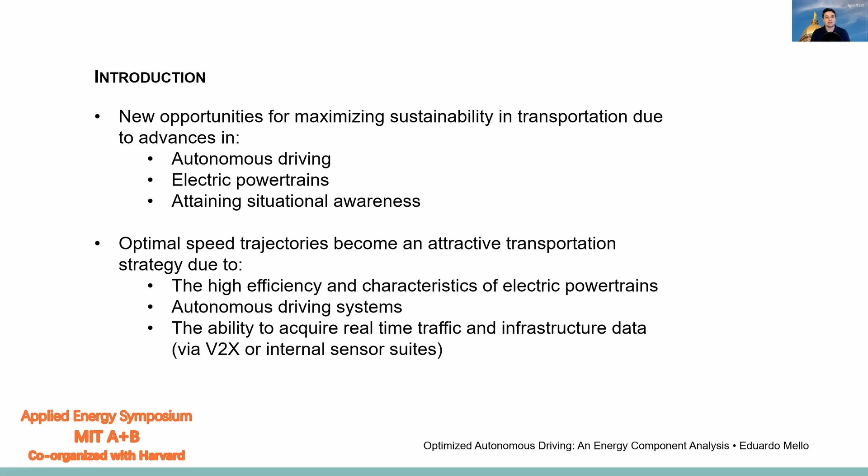Among the approaches that have already been taken to minimize the energy consumption of electric vehicles, I would like to highlight a few. The first one being green waves, that is when a vehicle tries to minimize the number of red lights it faces going through signalized intersections, utilizing vehicle information and infrastructure information. That is often coupled with eco driving, that is when a vehicle tries to minimize its speed variations and also the idling times and the number of stops to save on energy.

Another approach that's used is one pedal driving, that is when a vehicle starts to use regenerative braking as soon as the driver stops accelerating or removes their foot from the accelerator. And finally, optimal speed trajectories, where a vehicle with at least level 2 of automation could use infrastructure and vehicle information to generate an energy optimal speed trajectory to drive a specific segment of a road or street. And this could be the length between two signalized intersections, between two stop signs, or other traffic constraints like speed limits.

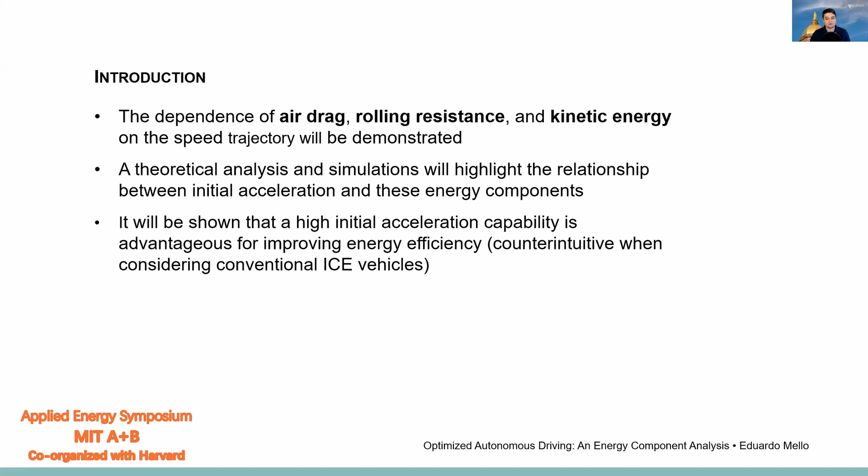In this presentation, we will focus on the dependence that energy optimal speed trajectories have on their air drag, rolling resistance, and kinetic energy components. We will demonstrate a theoretical analysis and simulations that highlight the relationship between the initial acceleration and these energy components. And we will also show that, counterintuitive to what we think about internal combustion engines, high acceleration capabilities are advantageous for improving the energy efficiency of electric vehicles.

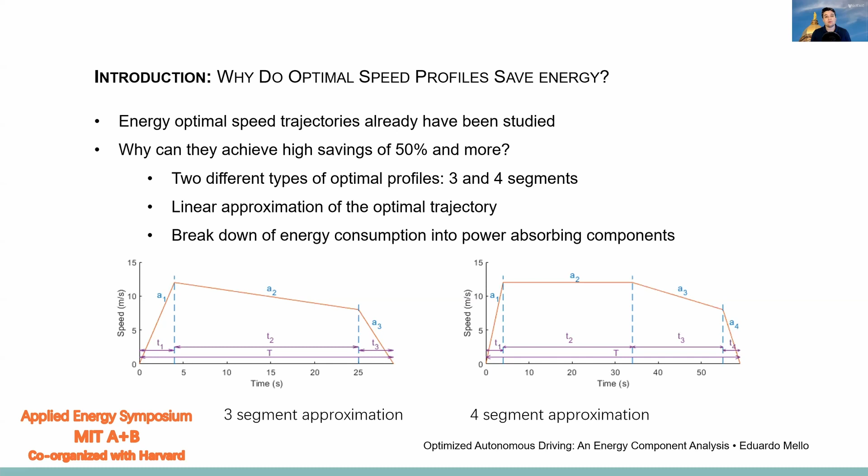Optimal speed profiles have been previously studied, and they were shown to save upwards of 50% of transportation energy. This brings the question of why do they achieve such high savings? In order to respond to this question, we will analyze a linear approximation of these speed profiles. There are two different types of optimal speed profiles: a 3-segment and a 4-segment one. We will focus on the 3-segment variant that is defined by an acceleration phase, a coasting phase, and a final braking. To analyze the savings, we will break down the energy components of this linear approximation into its power absorbing components.

In order to calculate the energy consumption of the speed trajectories studied in this paper, we will use the following energy model. It's based on the power at the wheel being the sum of all power absorbing components in a moving vehicle: the acceleration power, the air drag, the rolling resistance, and the hill climbing. We will assume the hill climbing to be 0 for our calculations, and multiplying that wheel power by the efficiency of the combined mechanical and electrical powertrain of an electric vehicle, we can get the power at the battery. Integrating that power at the battery, we get the energy of the vehicle.

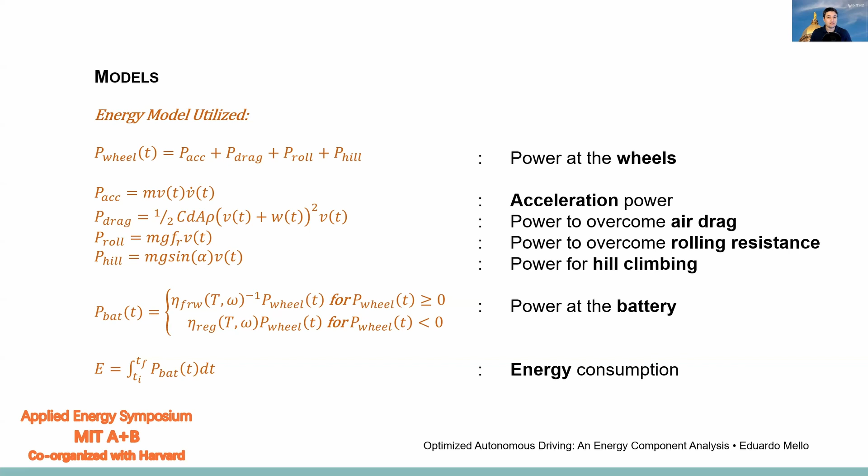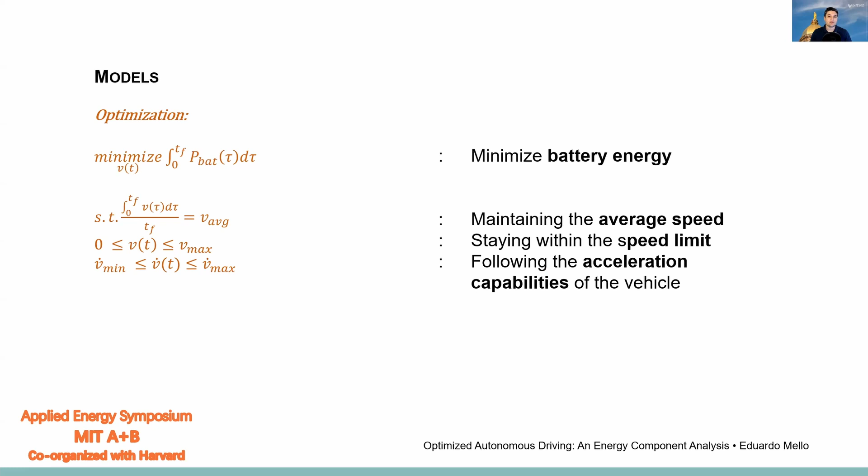As previously said, the energy component analysis will be based on the linear approximation of the three-segment optimum speed profile. In order to obtain this linear approximation, a few variables have to be defined. The first one being the distance traveled by the vehicle, the acceleration capabilities of this vehicle, and the average speed desired. From that, we can obtain the coasting deceleration and the duration of each one of the three segments.

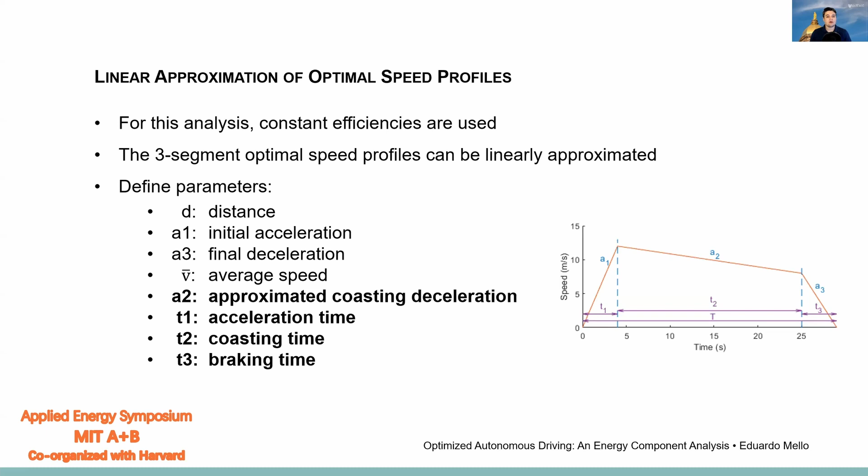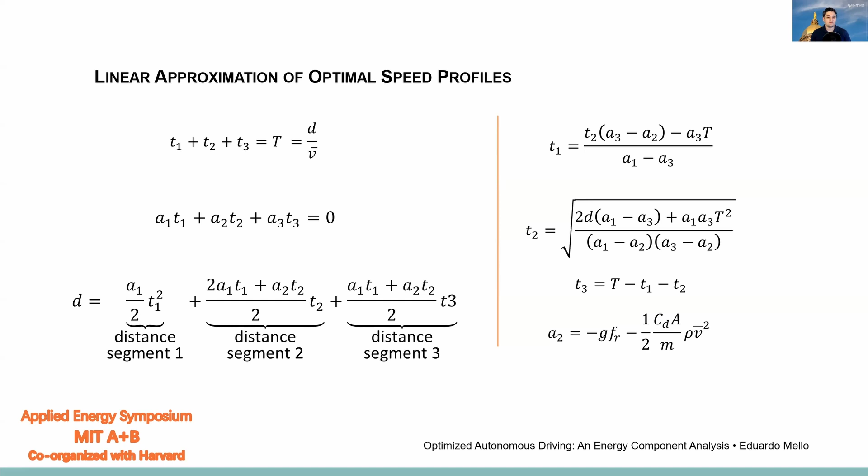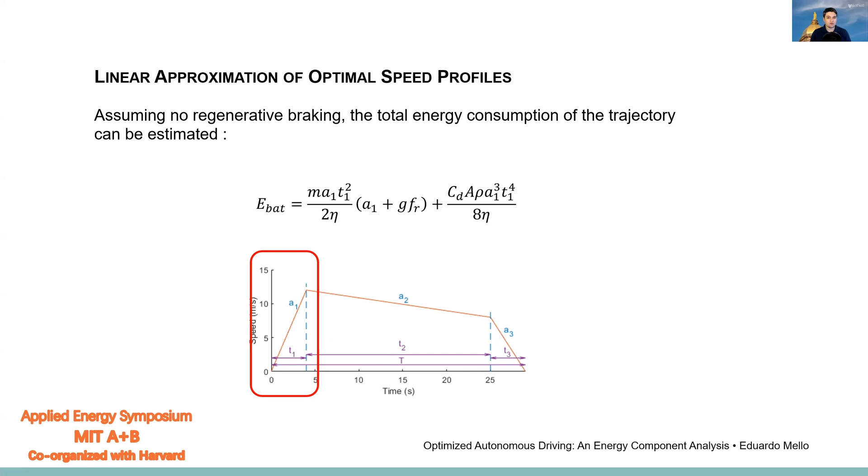Here, we show the energy consumption of three trajectories, a distilled version of the FTP75, the closed form solution, and the optimized trajectory of same average speed and segment length. The calculations were performed for segments varying from 300 to 700 meters and utilized 85% of forward motion efficiency and no regenerative braking. By comparing the first two bars, we can see that the estimated energy consumption utilizing the closed form equation gives you a very close energy value to the actual energy consumption of that trajectory.

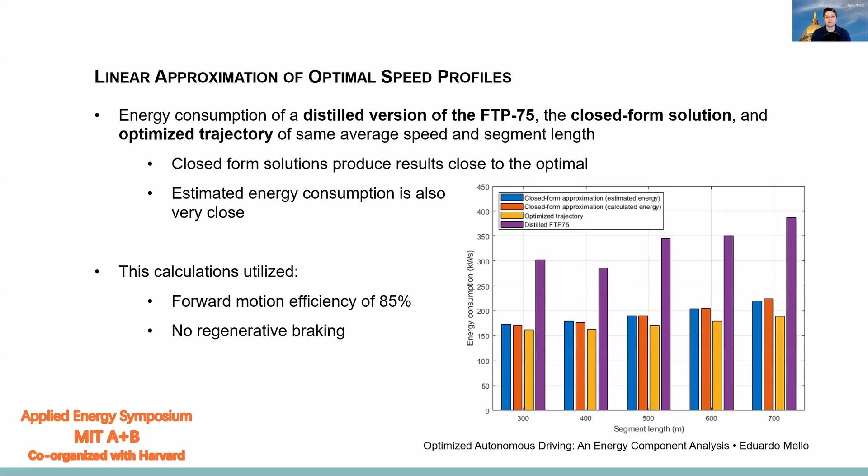The third bar shows that the energy consumption of an optimized trajectory with the same parameters is always a little better than the closed form solution, while the fourth bar shows that the energy consumption of the distilled FTP75 is always much higher than the optimized or the linear approximation of the optimization in any of the cases studied here.

The 300-meter trajectory from the previous slide is shown in here. We can see that the optimal trajectory and the closed form solution are very close to each other. The main difference is that the optimal trajectory utilizes coasting, while the closed form solution may be slightly accelerating or braking during the second segment of the trajectory.

The majority of the savings we obtain come from the fact that the linear approximation and the optimization, for that matter, reach a much lower maximum speed, significantly reducing the acceleration component of the work realized by the vehicle. That's named W kinetic or work kinetic in the third graph. Also, these trajectories only utilize energy in the first segment of the trajectory, and in the second and third segments, the accumulated kinetic energy is utilized to overcome the air drag and rolling resistance.

Looking at the third graph, the last bar in green represents how much of the kinetic energy was recovered to overcome these two other components, the air drag and rolling resistance. Thus, it works kind of like regenerative braking, but since it acts directly on the work at the wheels, it has a much higher efficiency than the actual regenerative braking. You can see that in the middle plot, while the typical trajectory utilizes energy for half of the total time, the linear approximation only utilizes a significant amount of energy for the first 3.5 seconds.

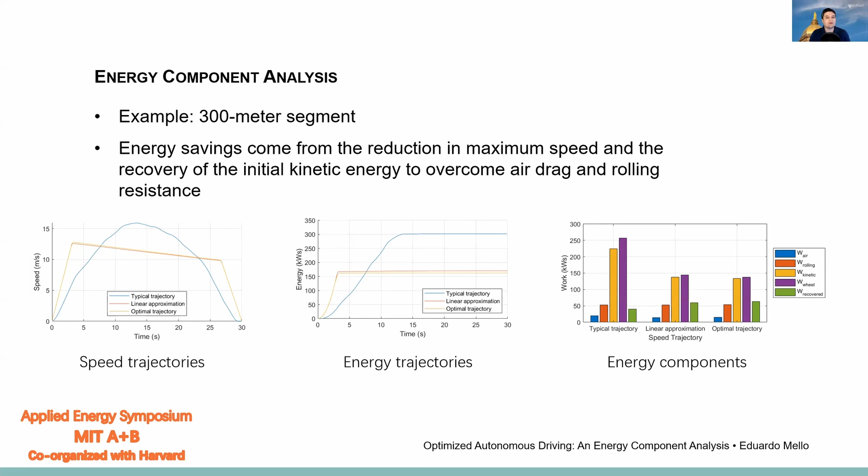This slide shows the energy breakdown for two more segment lengths, and we can see that the same trend happens for every segment length, with the linear approximation and the optimization utilizing much more of its kinetic energy to overcome rolling resistance and air drag.

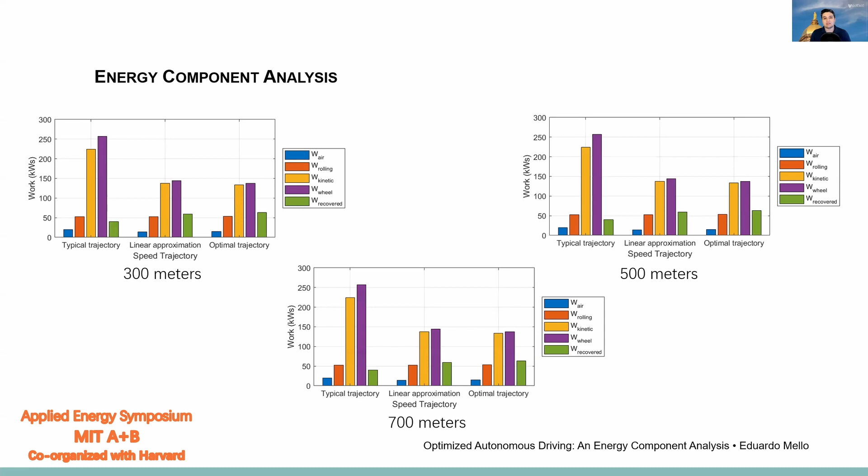It was previously demonstrated that high accelerations can provide higher savings in energy optimum speed profiles. And since most of our savings come from the reduction in maximum speed, having very short acceleration periods at the beginning of the speed trajectory, we decided to perform simulations to analyze how this initial acceleration can impact the energy consumption. Calculations with estimated energy, constant efficiency, and efficiency maps were used.

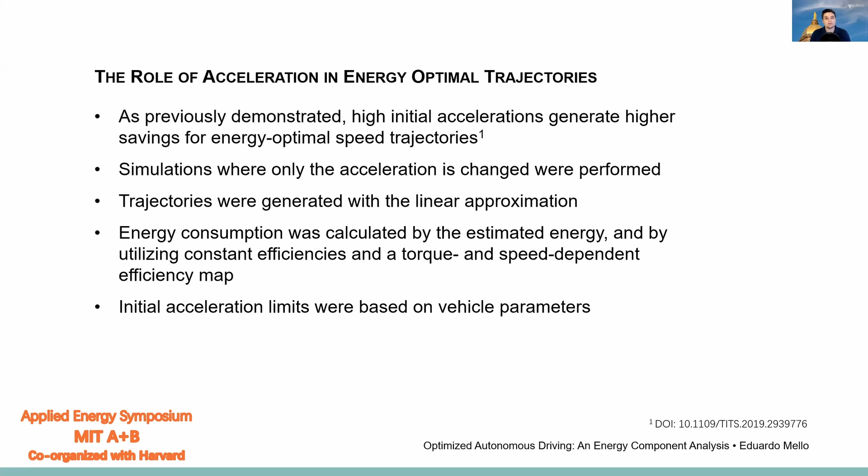In this analysis of the role of the acceleration, 2 efficiency models were utilized, the first one being constant efficiencies, where 85% of forward motion efficiency was used and no regenerative braking, and also efficiency maps were utilized. 2 vehicles were also considered, one based on the chassis data of a Nissan Leaf, and the second one based on the chassis data of a Tesla Model S.

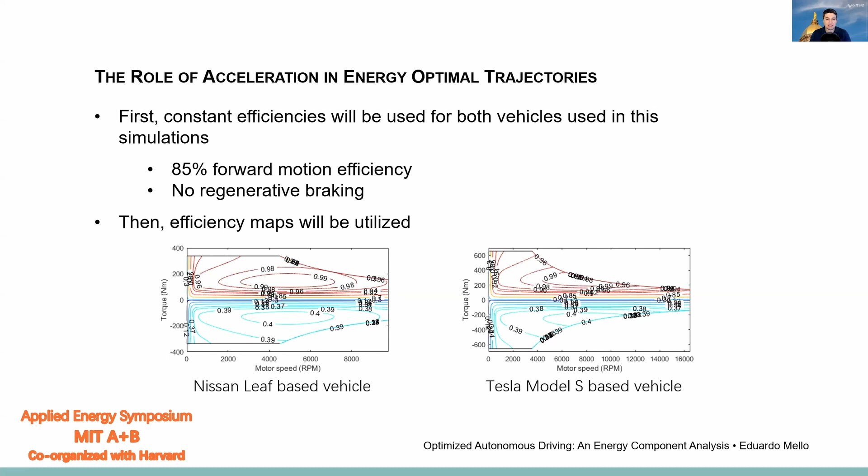For longer segments, the energy consumption is more linear than before, and the optimization does better than the estimated consumption for all accelerations, not only for high accelerations. However, the computation complexity of the approximated trajectory is significantly lower than the optimized trajectory, making it still an attractive implementation.

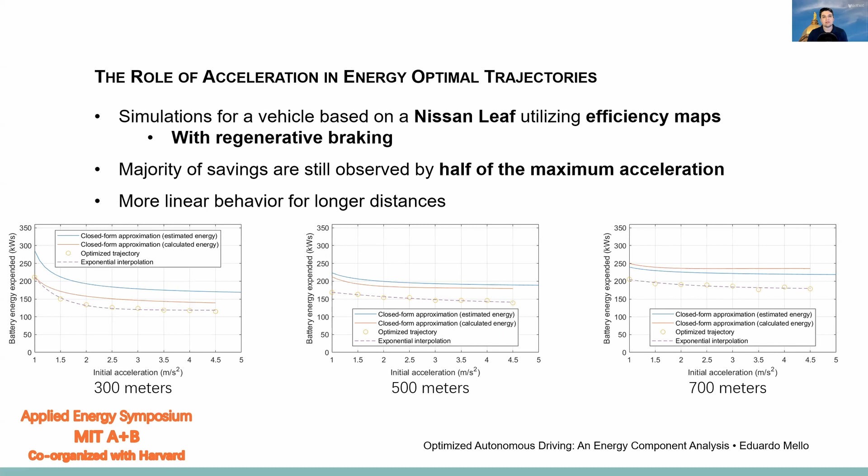A last point that's worthwhile mentioning is that the actual calculation of the energy consumption of the closed form approximation utilizes more energy than the closed form approximated value in the 700 meters scenario. And that's because the approximation is a better fit for shorter segments than for longer ones.

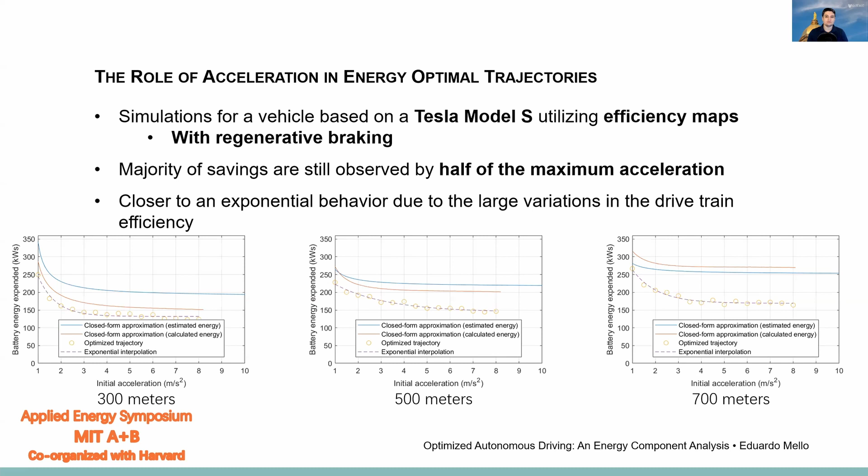From these previous results, we can conclude that the 3-segment energy optimum speed profile can be linearly approximated, producing satisfactory results. We also noticed that the optimum speed profiles achieved their high savings mainly from the reduction in maximum speed and also from utilizing the kinetic energy to overcome the air drag and rolling resistance throughout the second and third segments of the trajectory. We also saw that vehicles achieved most of their savings around half of their maximum acceleration.

And even though energy optimal trajectories can have a significant energy advantage over the linear approximation, which is especially pronounced for the more powerful engine utilizing the more complex speed and torque dependent efficiency model, the computational complexity of the linear approximation still can make it an attractive option for implementing in the real world.